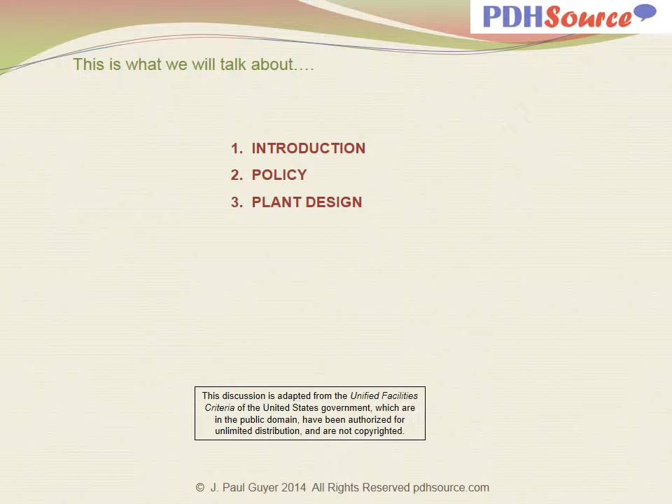And by way of introduction, just a little bit about me and what I've been doing for the last few decades.

This discussion contains data and information as criteria to guide the planning of steam and high temperature water central and individual heating plants. Engineering and economic considerations are identified to guide siting decisions, fuel selection, and the choice of either high temperature water or steam distribution media.

The primary purpose of these plants is to generate steam and high temperature water for space heating and process steam in the most economical, operationally efficient, and environmentally acceptable manner possible for distribution to groups of buildings.

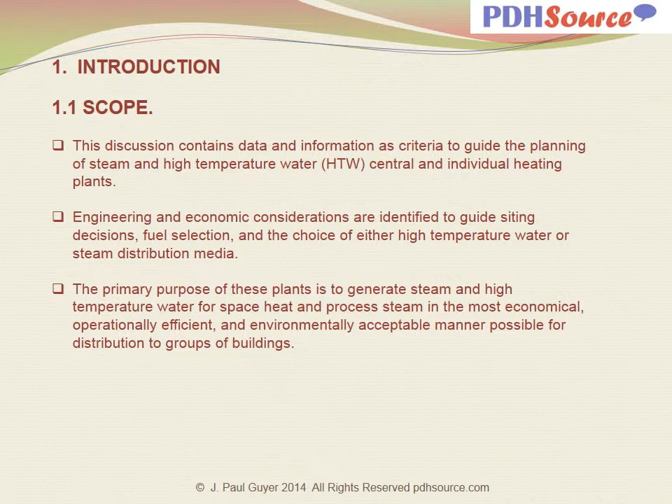New heating plants shall be designed to meet application requirements for the lowest overall ownership, operation, and energy consumption cost during their lifespan. The application of any facility must be justified by an economic analysis to ensure the most appropriate facility at the lowest overall cost to the owner.

The economic analysis for new or modified plant construction projects shall consider all suitable alternatives to determine the most cost-effective method of accomplishment. Figure 1 provides a list of cost considerations for comparing alternative plants.

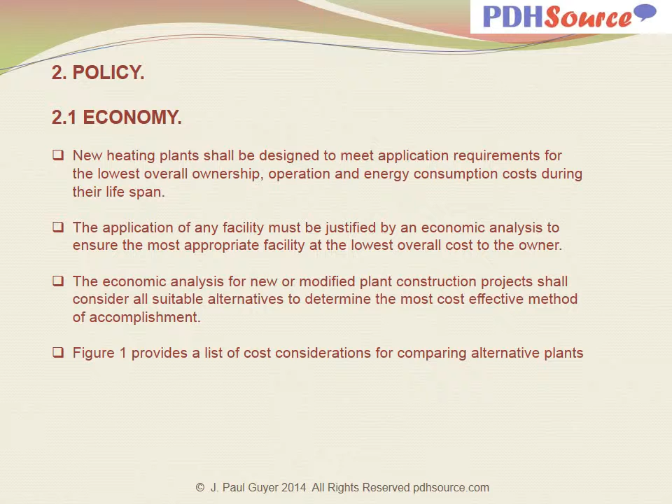Plant alternatives: central heating plants. These plants are for groups of buildings which are existing or anticipated within a 5-year program typically. Central heating plants are justified when the distribution system will have a lower life cycle cost than other alternatives.

Plants which generate electric power and heat, cogeneration, can be utilized when an economic analysis determines lower life cycle costs than other alternatives.

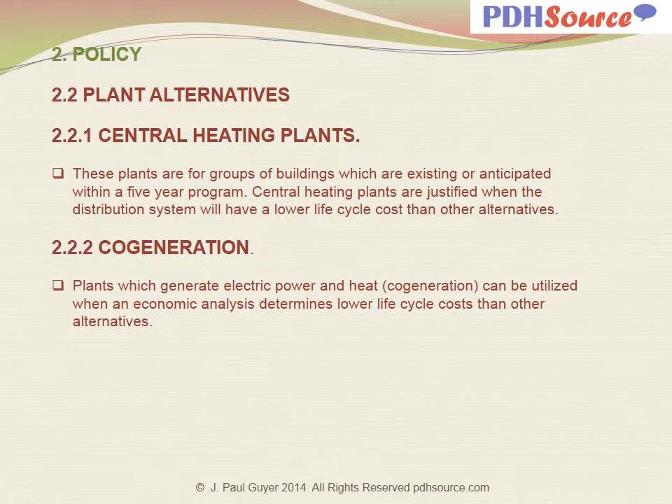Individual heating plants are typically inside or adjoin the building they serve. Individual plants are considered when economically justified and for the following reasons: when installation and maintenance of an extension of the distribution system from a central plant to an isolated building is not economically justified, when dispersal of facilities and continuity of services are so essential that disruption of service by any damage to the central heating plant and connecting distribution system cannot be tolerated, and when fuel costs are paid by occupants of residences, as an example.

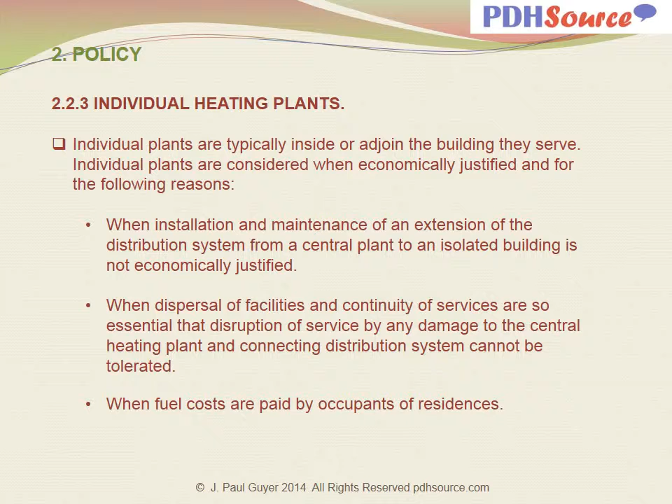With regard to expansion of existing plants, additional steam capacity, including reserve capacity for loads expected within, say, 5 years, may be added to an existing central heating plant. An economic study must show that modifications and additions to an existing plant and distribution system will be more cost-effective than other alternatives.

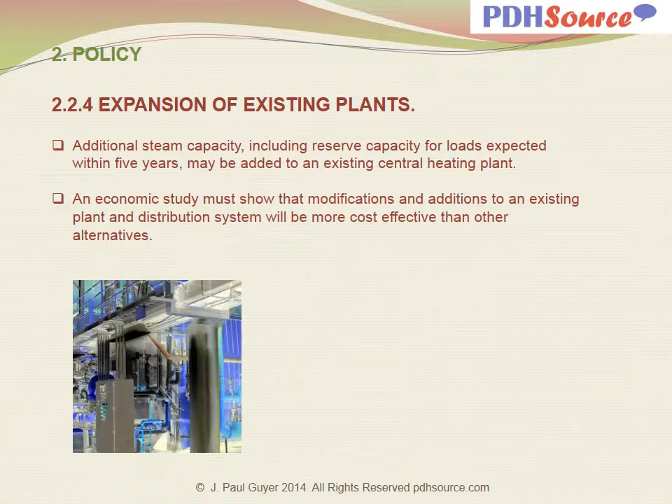This is figure 1, which indicates the format for comparing plant costs.

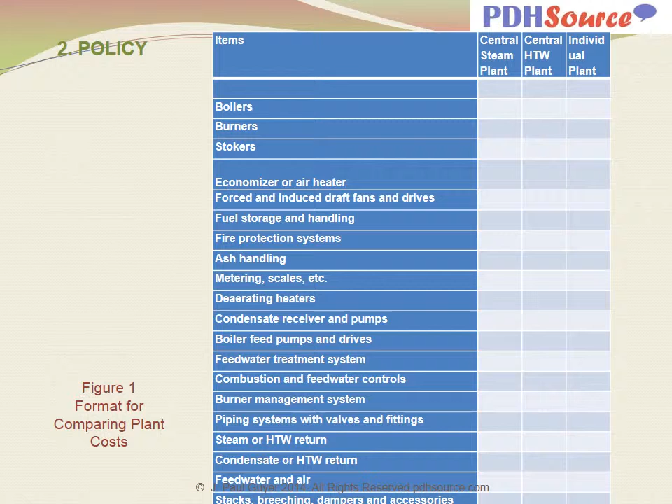This is a continuation of figure 1, which is the format for comparing plant costs.

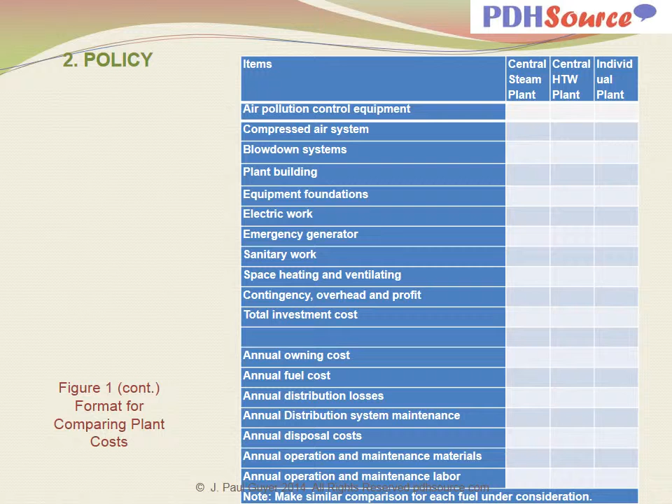In consideration of rehabilitation versus replacement, if an existing plant has deteriorated to the point of producing numerous outages, is becoming a safety hazard, or is not in compliance with air pollution regulations, its rehabilitation or replacement will be determined by a life cycle economic analysis.

If replacement is determined to be the most cost-effective, then the capacity of the modern plant is required to handle any additional projected load.

Necessary equipment and systems for air pollution regulation compliance and other operating safety or maintenance deficiencies must be included for either the rehabilitated plant or replacement plant.

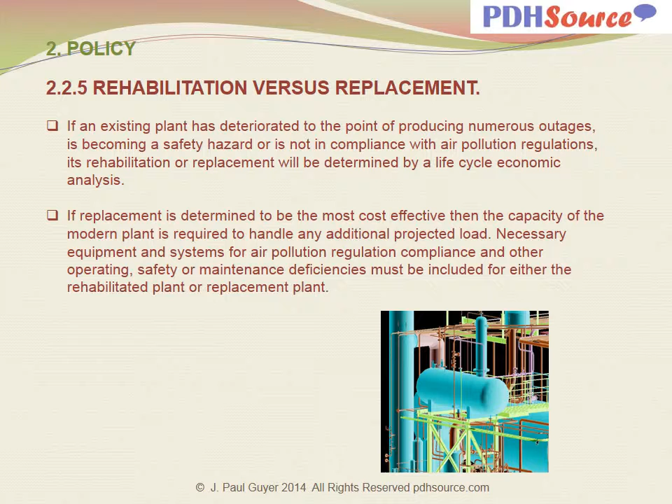A standby facility is a facility which is redundant to the primary facility and maintained to operate in the event the primary facility becomes inoperable.

A standby facility will be considered only when a crucial need exists and redundant equipment and systems in the primary facility will not provide required or necessary reliability of continuous operation.

B, an outage could endanger life or property or seriously interfere with the mission of an activity. C, the financial loss to the owner from a reasonable outage schedule will be greater than the costs of standby equipment. D, the consumer load is sufficiently critical.

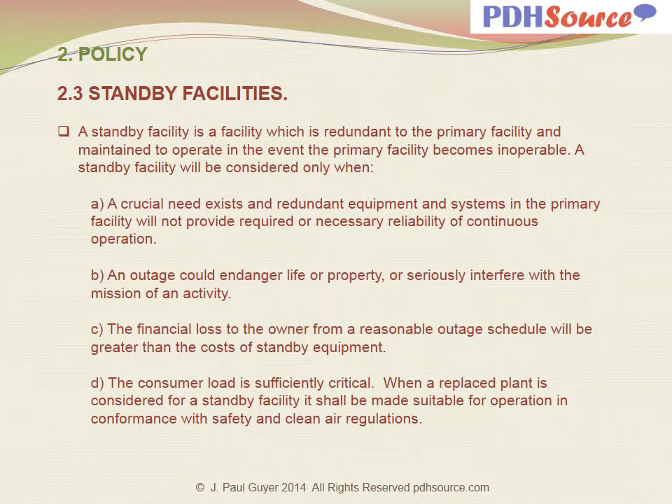When a replaced plant is considered for a standby facility, it shall be made suitable for operation in conformance with safety and clean air regulations.

In considerations of steam versus high temperature water for a heating plant system, central steam heating plants shall be utilized unless a thorough analysis dictates that a high temperature water plant is preferable. The following factors will be among those considered in the analysis.

A, economic advantages of thermal storage of the high temperature water system in sizing of equipment such as boilers, pumps, and piping. B, operating and maintenance cost of high temperature water distribution system versus steam distribution system.

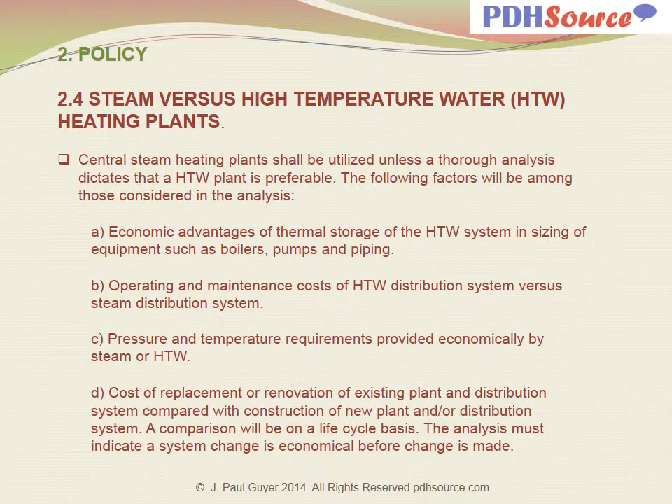C, pressure and temperature requirements provided economically by steam or high temperature water. D, cost of replacement or renovation of existing plant and distribution system compared with construction of new plant and/or distribution system. A comparison will be on a life cycle basis. The analysis must indicate a system change is economical before change is made.

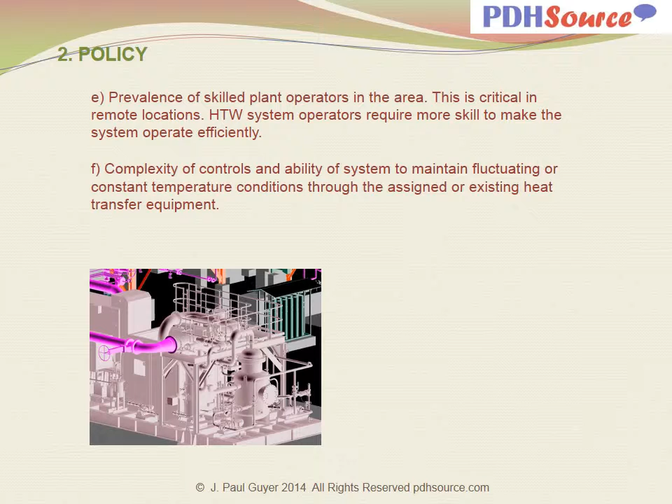E, prevalence of skilled plant operators in the area. This is critical in remote locations. The high temperature water system operators require more skill to make the system operate efficiently.

And F, complexity of controls and ability of system to maintain fluctuating or constant temperature conditions through the assigned or existing heat transfer equipment.

With regard to issues of fuel selection, select fuels which are within the national guidelines and which produce the required performance at lowest life cycle costs.

The fuel policy has been to use a solid domestically produced fuel as a primary fuel for heating plants of medium size and above, except where use of a solid fuel is not feasible because of geographic considerations. Existing plants burning fuel oil or gas may continue to burn fuel oil or gas.

New or replacement boilers in plants with design input over the threshold minimum established by owner policy are required to burn solid fuel. Another fuel may be used when the primary fuel is not available or where it is critical to keep the steam plant in operation on an emergency basis. When oil is used, the boiler should be capable of conversion to grades number 2 through number 6 oil.

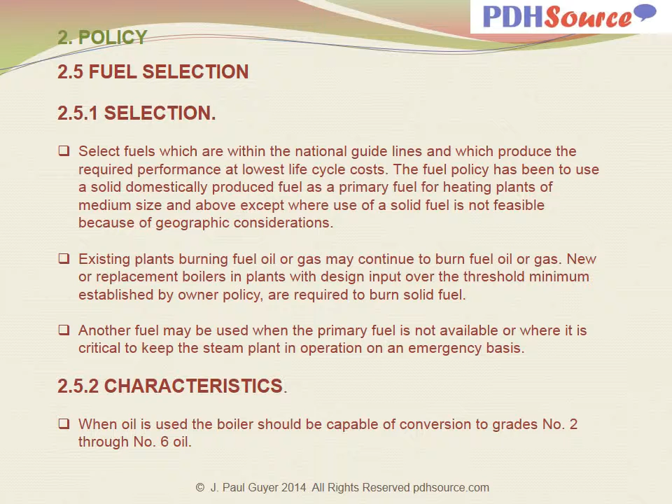It's mandatory to conform to federal, state, and local air and water pollution abatement codes.

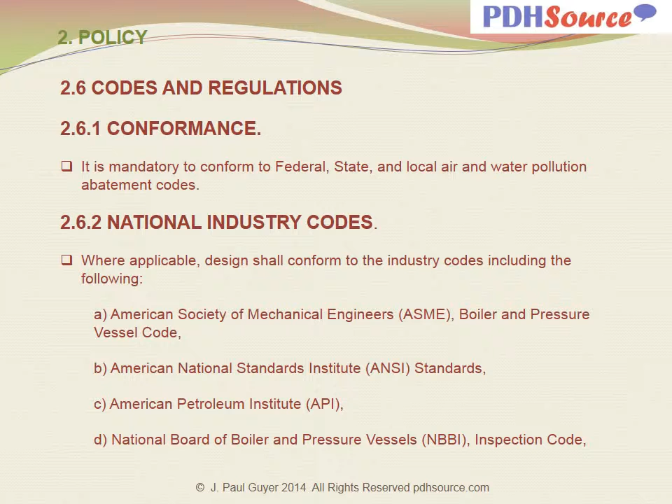Where applicable, design shall conform to the industry codes, including the following: ASME Boiler and Pressure Vessel Code, ANSI standards, API standards, National Board of Boiler and Pressure Vessel Inspection Code, ASHRAE, ASTM standards, American Welding Society, American Institute of Plant Engineers (AIPE), NACE (National Association of Corrosion Engineers), NFPA, Air and Waste Management Association, American Institute of Chemical Engineers, and AIME (American Institute of Mining, Metallurgical, and Petroleum Engineers).

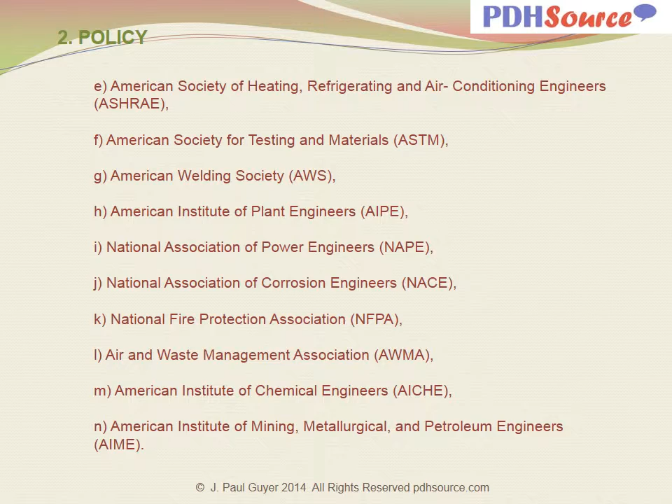Now, with regard to planning of the plant design, a plant study shall be conducted before authorization to develop definitive designs. The study will evaluate plant operating parameters with a primary emphasis on economic factors. Major emphasis will also be given to energy conservation and environmental concerns.

The documented study shall determine: A, plant load and operating characteristics; B, fuels to be burned; C, required dependability of service; D, predicted lifespan of the plant; E, estimated cost, both capital and operating; F, required pollution abatement equipment.

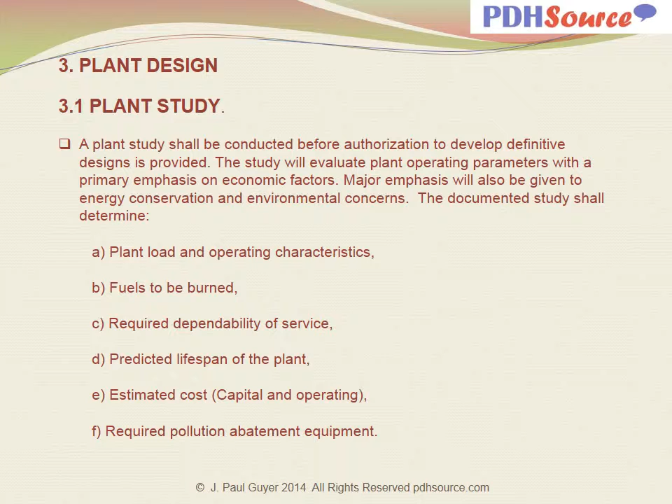Figure 1 provides the predominant costs which affect the plant. It may be used as a basis for comparing plant alternatives. Table 1 provides a list of predominant design considerations for design of thermal plants.

Now, with regard to the thermal generating equipment, the combination of number and size of thermal generating equipment in a plant determines the plant capacity.

A plant may be installed with a single boiler able to provide the required plant capacity for applications where loss of the boiler will not adversely affect the operation. Most applications cannot tolerate the complete loss of a thermal plant.

These applications require that two boilers provide 135 to 150% typically of the plant's maximum steam demand. The continuous capacity of the plant with a boiler not operating shall be greater than the essential plant load. A spare boiler may be needed to provide the necessary backup.

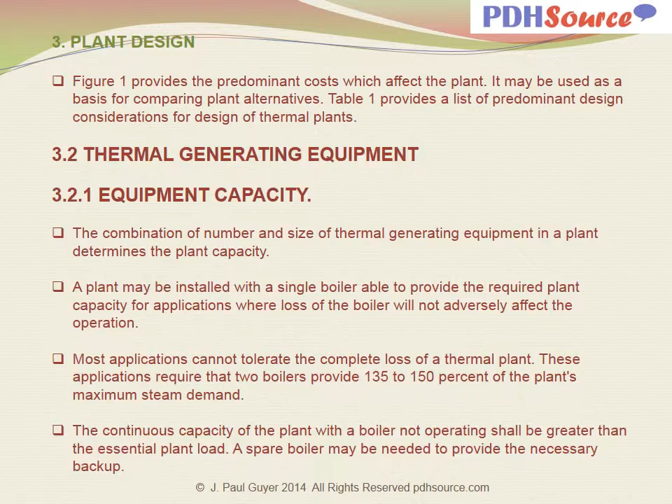The recommended method for selecting the number of boilers in this situation is to use 3 equal capacity boilers which can each carry 50% of the maximum load. A variation of this scheme is to use 2 equal capacity boilers, each capable of providing 2/3 of the maximum load, and a smaller boiler capable of carrying 1/3 of the maximum load. The maximum steam plant demand shall not require operation of more than 3 simultaneously fired boilers.

A smaller peaking and off-season boiler should be included if increased efficiency at low loads economically justifies the installation. Avoid installation of initial main boilers whose capacities are smaller than those to be added when the plant is expanded. Avoid unnecessarily large numbers of small boilers.

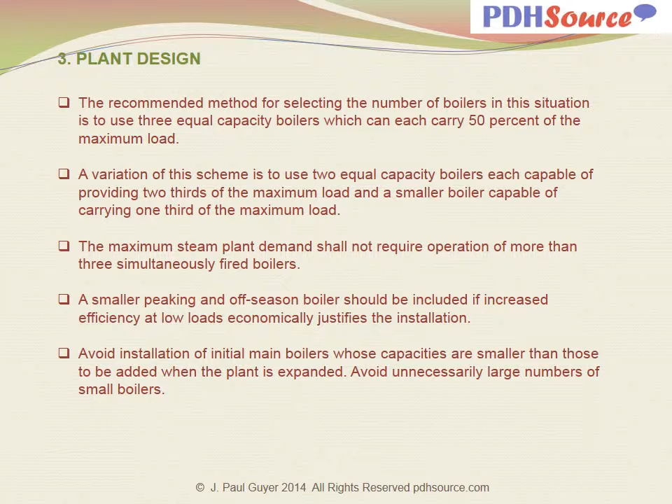Table 1 provides design considerations. Factors discussed are load characteristics, fuels, availability of water, electric service, and plant location.

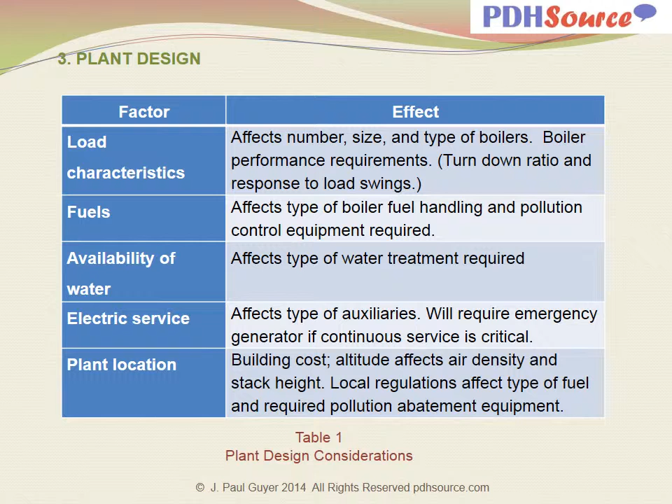With regard to the minimum load, the plant shall operate efficiently at minimum loads. The following variables can be manipulated to meet minimum load requirements. First, the type of fuel and method of combustion. This will determine operating ranges of combustion control turn down, which may range from 8:1 to 3:1. The boiler turn down must include the minimum load. By changing burner tips in oil firing, low minimum loads can be obtained.

With regard to the number of boilers, more smaller boilers will lower the minimum plant capacity. This option should not be considered if plant would require more than 4 equal capacity boilers.

With regard to the minimum load boiler or boilers, where the difference between a minimum plant steam demand and minimum boiler load with main boilers is large, a small packaged boiler unit with its own boiler feed pumps should be used to provide low plant capacities.

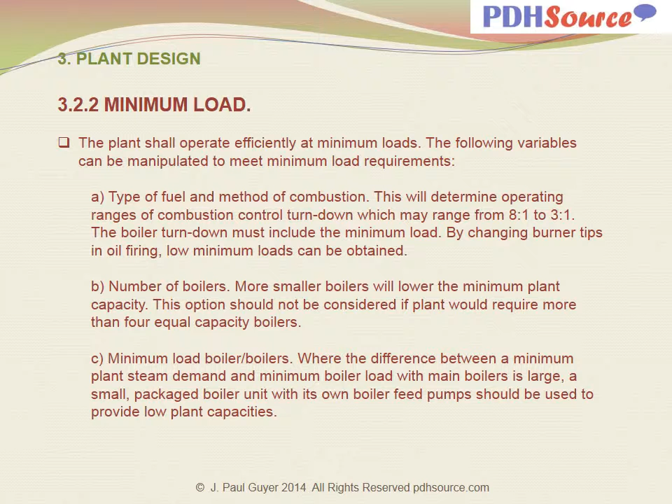Select a plant operating pressure which provides adequate pressure at any user outlet and allows for the pressure drops through piping in the building, distribution system, boiler plant, and the dry piping in the boiler steam drum.

Boiler design pressure should be 250 psi minimum for all water tube boiler applications. For all other applications, the design pressure should be determined in accordance with the ASME boiler and pressure vessel code. Modify pressures when it's economical and practicable to distribute steam at pressures below or above those indicated by this discussion.

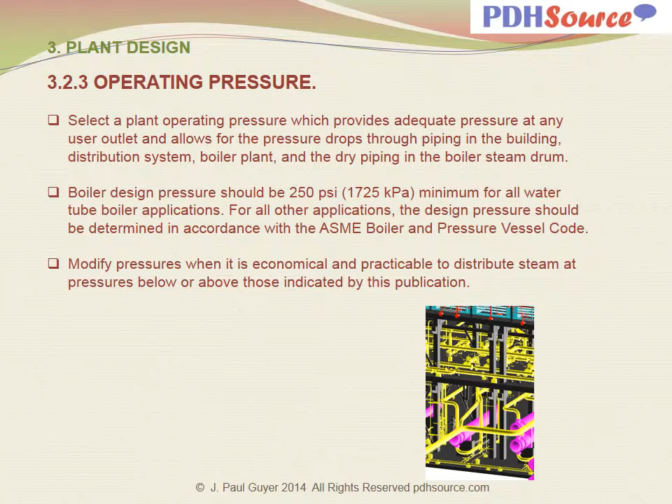For heating plants, normally do not require operating steam pressures over 150 psi-G. Lower pressures have smaller heat losses from distribution piping.

Cast iron valves can be used up to 125 psi-G, but steel valves are required between 125 and 150 psi-G, unless 250 psi-G class cast iron valves are used.

For this reason, the recommended operating pressure range is 100 psig to 125 psig for maximum economy of distribution piping, including valves and fittings. When the maximum plant and distribution loads are large and the most remote terminal requirements cannot be satisfied with sufficient quantities of steam,

combinations of higher pressures and related pipe sizes should be analyzed to compare installation and operating costs of various steam pressures up to 250 psig, which is the next higher pressure rating of cast iron valves.

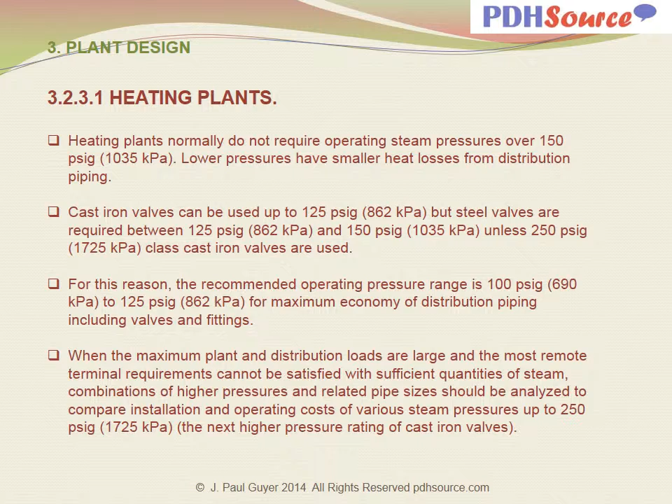For process loads requiring higher pressures than 100 psig, when a process load is required in excess of 100 psig, an economic analysis should determine whether steam should be generated and distributed at the pressure required at the process, distributed at two pressure levels, or generated at the higher pressure locally by a separate heating plant as needed.

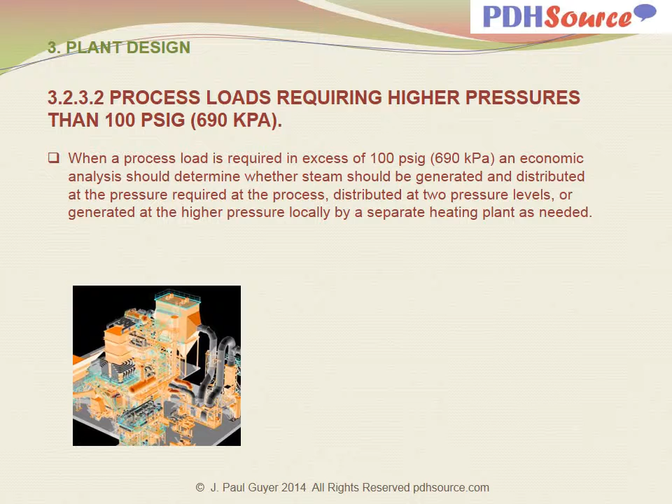Water tube and fire tube boilers are the two general types of boilers available. The boilers are also classified as either high pressure or low pressure, and whether they produce hot water or steam.

A high pressure boiler is a boiler which operates at pressures above 15 psig. The advantage of the high pressure boiler is reduced boiler size and distribution piping required to equal the capacity of a low pressure boiler. Most large capacity boilers are high pressure boilers.

A hot water boiler is a misnomer since the water does not boil. A high temperature water boiler is a hot water boiler which produces water at temperatures higher than 250 degrees Fahrenheit.

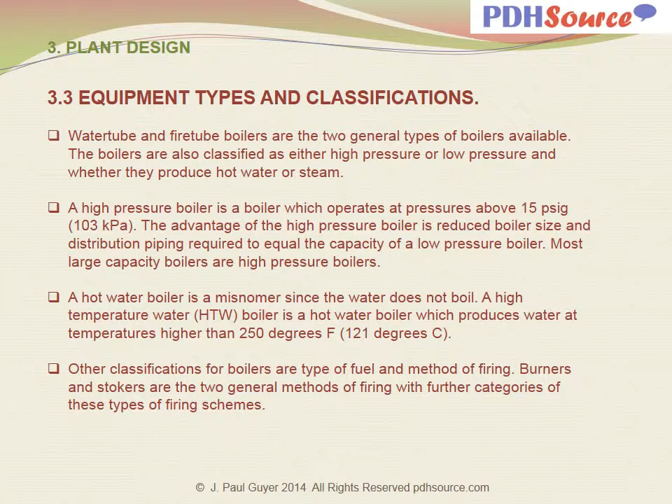Other classifications for boilers are type of fuel and method of firing. Burners and stokers are the two general methods of firing, with further categories of these types of firing schemes.

Once the operating parameters, load and fuel, have been determined, the type of boiler which will provide the best operating characteristics shall be selected. Table 2 lists the advantages and disadvantages of high temperature hot water boilers versus steam boilers. Table 3 lists acceptable boiler types and criteria to consider when selecting the type and possible pollutants to control. Pollution control equipment will be a major cost factor when evaluating the most cost-effective alternative.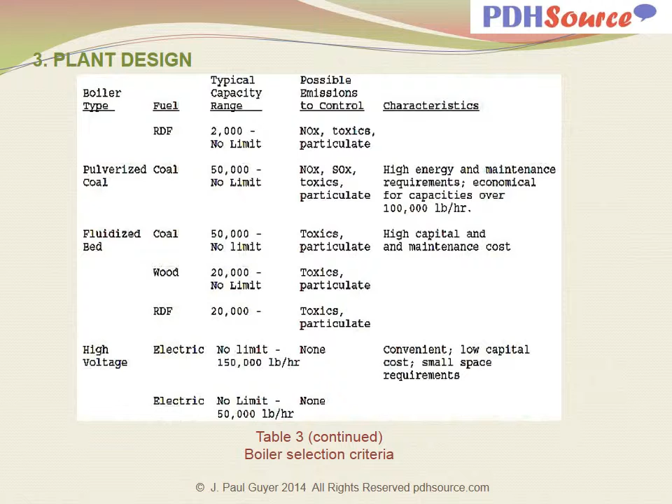Boiler design is primarily dependent on the fuel and type of firing. Both furnace heat release rate and EPRS are factors which determine distribution of heat within the furnace. Proper values must be maintained to keep local absorption to a minimum and avoid hotspots.

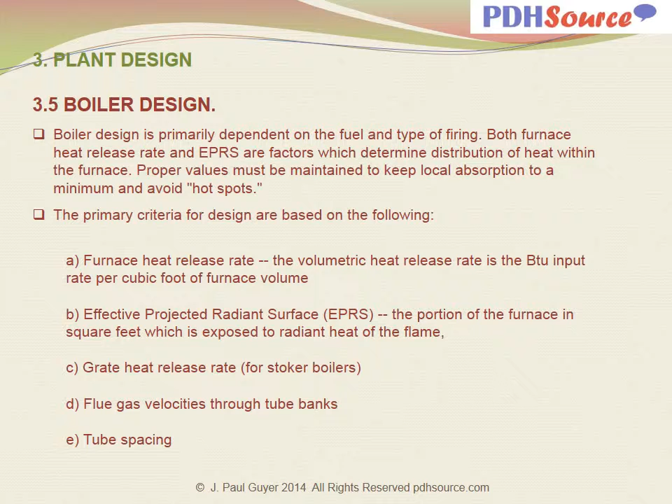The primary criteria for design are based on the following: A. Furnace heat release rate. The volumetric heat release rate is the BTU's input rate per cubic foot of furnace volume. B. Effective projected radiant surface, EPRS, the portion of the furnace in square feet which is exposed to radiant heat of the flame. C. Grate heat release rate for stoker boilers. D. Flue gas velocities through tube banks. And E. Tube spacing.

Computation of effective radiant heating surface for water tube boilers are based on the following. Bare metal, covered, or metallic ore covered tubes and headers projected area, external diameter times length of tube, of the tubes or header. B. Extended surfaces, metal and metallic surfaces extending from the tubes or headers, 60% of the flat projected area.

Except that metal blocks not integral with tubes or headers, extended surfaces less than 1/4 inch thick or more than 1 1/4 inches in length, and the part of the extended surface which is more than one tube or header radius from the tube or header from which it extends, are not included.

C. Furnace exit tubes. The projected areas of these portions of the first two rows of exit tubes receiving radiant heat from the fire.

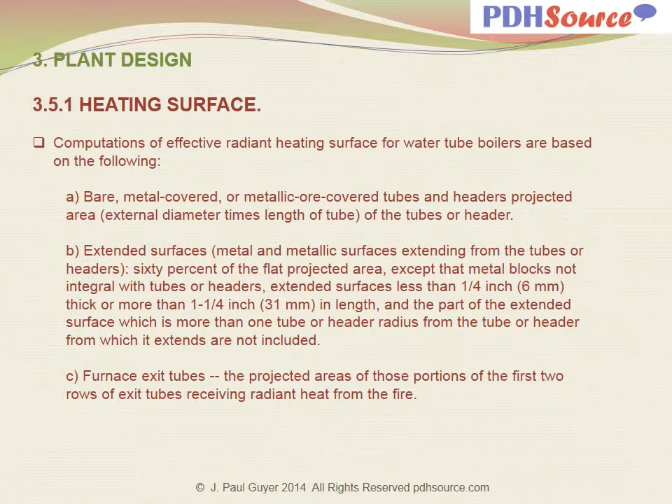D. Grate heat release rate. This burning rate is the higher heating value in the coal used per hour at rated boiler capacity divided by the total active burning area of the stoker grate. These values are based on the assumption that furnace walls are water cooled, that there is adequate furnace volume, and that the most desirable type of coal for the unit is used. In the absence of these conditions, values should be reduced to ensure satisfactory combustion. A high grate heat release rate will cause high carbon loss and increased particulate emissions.

E. Flue gas velocities through tube banks. Gas and light oil flue gas velocities are typically determined by the need to limit draft losses.

Coal, wood, or solid waste boilers need to limit flue gas velocities to prevent undue erosion of boiler convection tubes. The gas velocities through the convection section of these boilers shall not exceed velocities shown in Table 4.

Tube spacing is governed by the amount of deposits which will accumulate. Spacing is not critical for boilers firing gas or distillate oil. Boilers firing solid fuels or residual oil need proper spacing and proper soot blowing arrangement to limit deposit buildup on tubes, poor heat distribution, poor efficiencies, and premature tube failures.

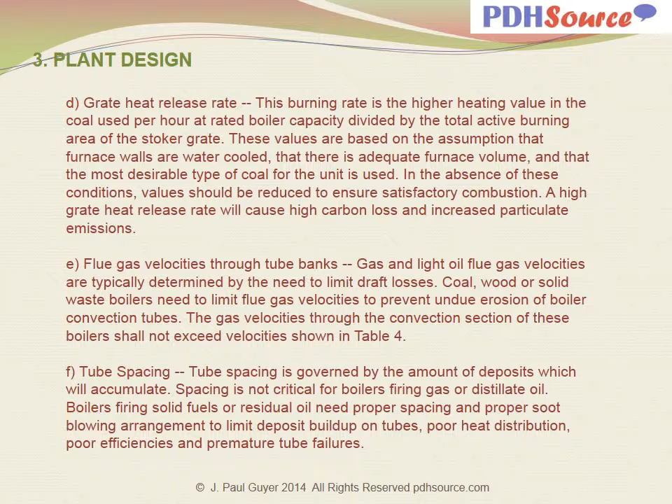Table 4 indicates maximum flue gas velocities in feet per second in convection sections for coal, wood, or solid waste boilers.

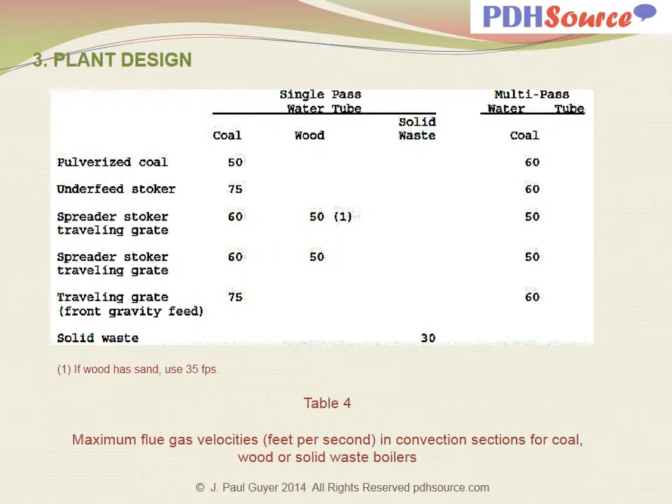Now a few comments regarding plant layout. It should be designed to reduce maintenance time and allow for easy operation of equipment. Future situations to consider include: A, tube cleaning; B, tube replacement; C, future expansion; and D, conversion fuels.

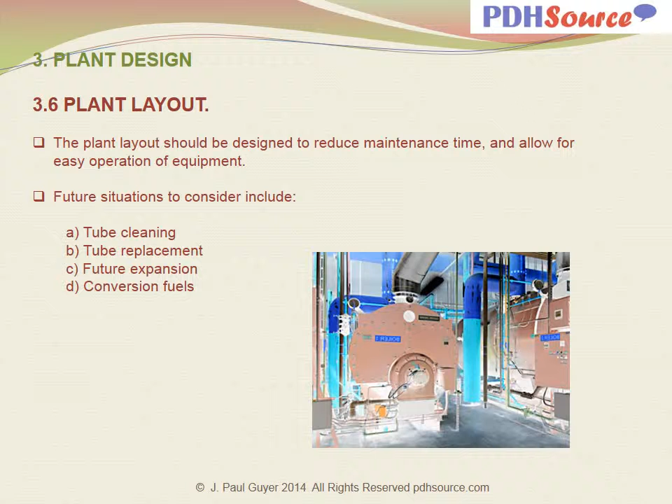Tube replacement for fire tube boilers typically requires a space in front of the boiler which is equal to the boiler's longest length. If there is a possibility of future conversion of firing equipment to another fuel, provide space for the installation and operation of such equipment and for local storage and handling of the new fuel.

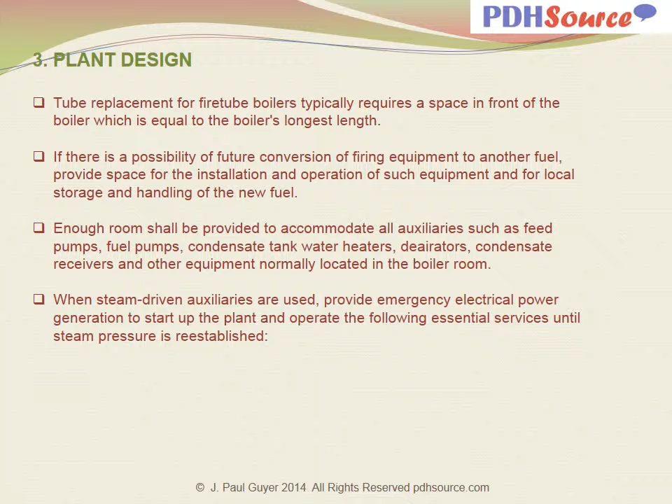When steam-driven auxiliaries are used, provide emergency electrical power generation to start up the plant and operate the following essential services until steam pressure is reestablished: A, coal and ash handling, coal firing, emergency lighting, instrument compressors, combustion management controls, flame safeguard controls, control valves, control room ventilation, and other essential operation requirements, including the auxiliaries for one boiler.

B, emergency electric power shall be provided for all essential services, including plant auxiliaries. Minimum emergency electrical power shall be that which is capable of allowing the plant to generate steam sufficient to serve essential loads.

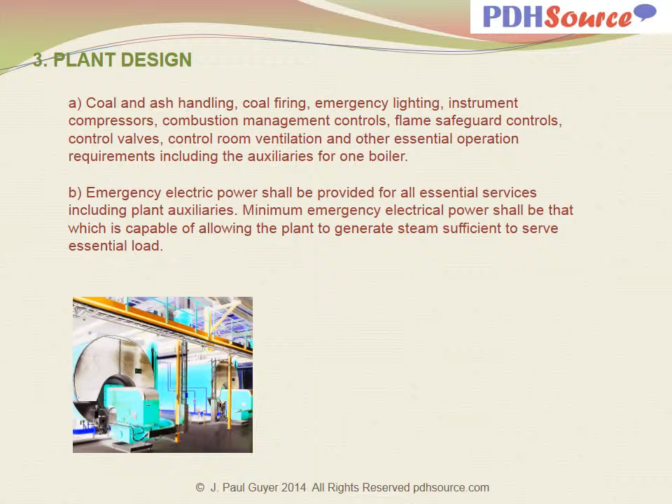Now, a few comments regarding feedwater pumping systems. The ASME Boiler and Pressure Vessel Code requires that boilers having more than 500 square feet of water heating surface and firing a solid fuel not in suspension be provided with two means of feeding water.

It's recommended that all coal stoker fired boilers with a capacity of over 100,000 pounds per hour should have dual feedwater systems containing separate headers, check valves, isolating valves, and regulating valves for operation flexibility and emergency.

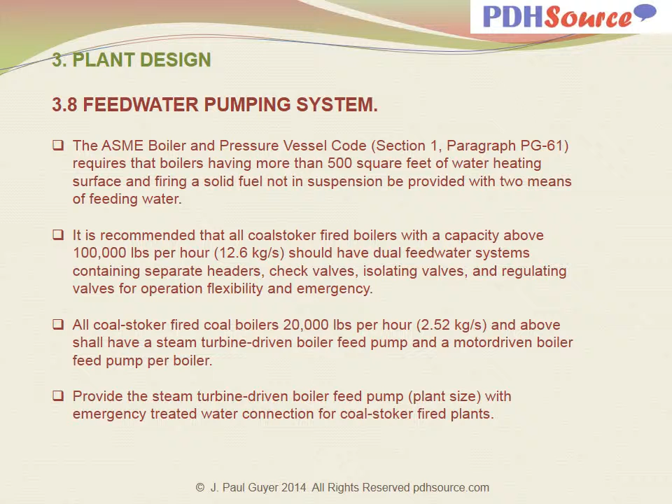All coal stoker fired coal boilers 20,000 pounds per hour and above shall have a steam turbine-driven boiler feed pump and a motor-driven boiler feed pump per boiler. Provide the steam turbine boiler feed pump, plant size, with emergency treated water connection for coal stoker fired plants.

Consider uses for secondary steam to determine ways to operate a plant more effectively. Several possible ways of using steam for more economical operation are fuel oil tank heating coil, water heaters, absorption type refrigeration machines, and space heating.

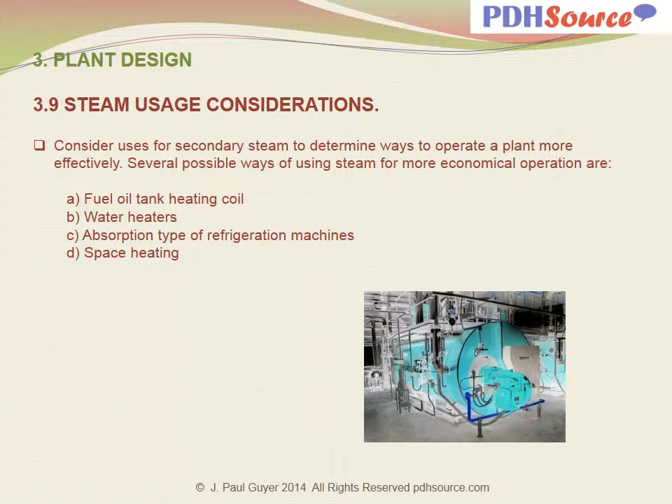With regard to refrigeration units, addition of refrigeration units to a plant design should be considered where heating plant steam can be used during the summer to serve refrigeration machines. Chilled water produced by steam absorption or steam turbine-driven refrigeration compressors can be distributed economically to buildings for space cooling.

A combined plant saves considerable building cost. The addition increases annual plant load and may reduce owning and operating cost. Turbine-driven equipment can be economical if there is use for low-pressure exhaust steam.

Absorption refrigeration equipment does not work efficiently at low loads. If absorption equipment is not a significant load, it's advisable to utilize electric-driven centrifugal equipment. This eliminates the need for low-pressure summer steam and saves distribution costs, line losses, fuel, and manpower.

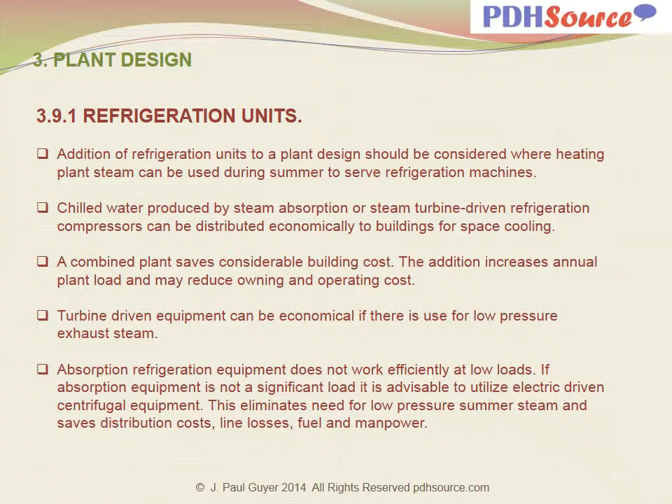Reliability and continuity of service during power outages should also be factors when determining the most cost-effective alternative. Steam-driven auxiliaries may be provided in lieu of or in conjunction with electric motor-driven units.

Possible auxiliaries which can utilize steam drives include feed pumps, condensate pumps, induced draft fans, forced draft fans, air compressors, overfire air fans, and fuel oil pumps. In all cases, sufficient electric motor-driven units must be provided to permit cold startup of the boiler plant.